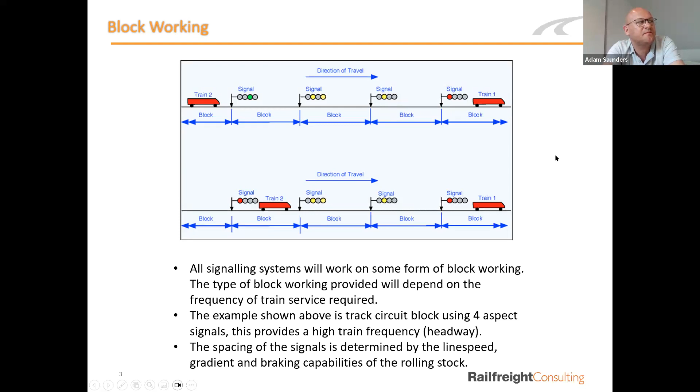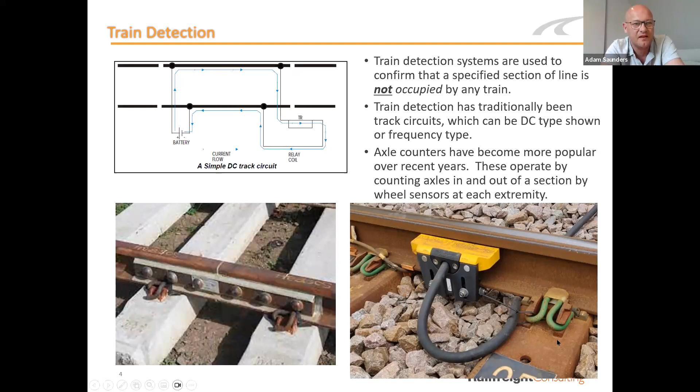And then just moving on to signal boxes. So obviously we've talked about the signals in the first slide. We've talked about train detection. We haven't covered points, but points move trains from one line to another, and they have to be detected, etc. And all of that forms a signalling system. That signalling system has to be controlled from somewhere by somebody. And that is what we call a signal box, where a signaller is located.

So the area that a signal box could cover was limited by how strong the signaller is to pull a wire over a certain amount of metres to clear a signal or move points. So on a section of line, you would have a signal box like that basically at every junction or at every station to control level crossings, etc.

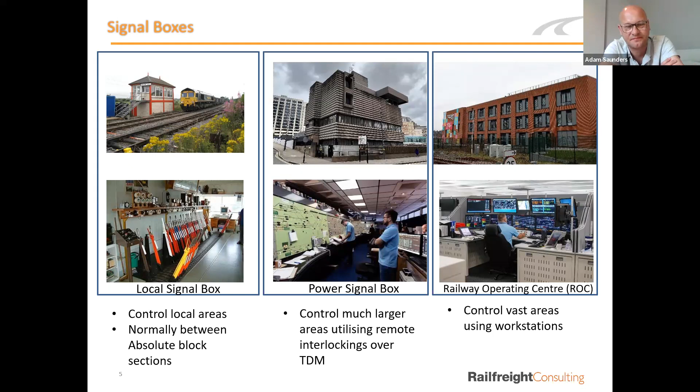Level 2, where you've got no line side signals, but they can be retained if need be. And the driver receives an in-cab indication of what the signal is. So it's still fixed block. So instead of having a physical signal at the side of the track, you have an indication to the driver in the cab. So obviously that's more cost effective because you've got less line side equipment.

And then level 3, which is the pinnacle of ETCS, where you have moving block. So where I talked before about fixed block, you can only let one train into a section at a time. That's quite restrictive to getting the maximum amount of train frequency on a line. So moving block is where the signalling system, with some clever technology, keeps the train behind a safe distance from the train in front. So a bit like adaptive cruise control that you have on cars these days on motorways, etc.

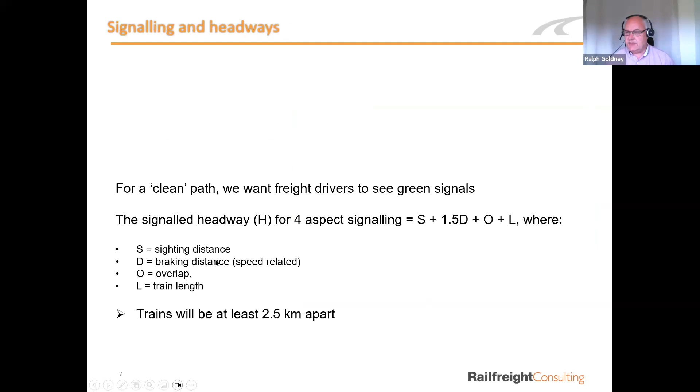Well, Adam's said a whole load of things which are probably more important than some of the people watching realise, because it leads us into a whole load of things about how you might plan trains. So let's take the top of this diagram again. We're coming from the left. As Adam mentioned, for human factors purposes, you want train drivers to see green lights.

And the other thing that's important to realise is that, unlike with trucks on a road, we always run the railway such that a train can stop before it gets to the position of the train in front. But that starts having some quite significant impacts on the capacity, and therefore how we put trains in the timetable. So typically in Britain, blocks are about half a mile long if we're old school, or about 800 metres if you're a bit more modern. And therefore you can see that if we require 2 blocks to brake a train, typically trains can brake in about a mile, something like that.

But then look at what we actually want to do, which is what's shown above. We want the train to approach a green signal, which effectively means there have to be 3 blocks between that and the train in front. So if you go and ask signal engineers, people like Adam, what the headway for signalling is, they'll quote that little formula there, and it's got 1.5 times the braking distance, because obviously 3/2 is 1.5.

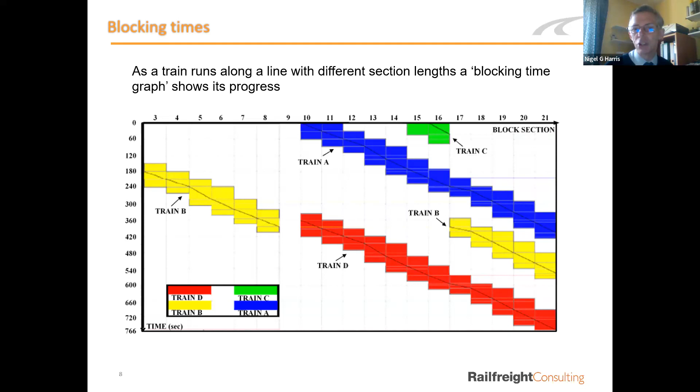So the trains themselves may be several miles apart, but we're just on the verge of one train impeding another. And that's really what we try and avoid doing. Thanks, Ralph. So that would be fine if you only had 2 trains.

We run about 24,000 trains a day in Britain, and there's, you know, Clapham Junction with trains all over the place. And this is where this all gets a bit tricky. So we're now going to look at how we're going to do that. Thank you.

So, focusing specifically on freight, we have a freight customer who has some requirement. I'd like to move this many hundreds or thousands of tons of stuff between here and there. And you'd typically go to a freight operating company, have a chat with them, discuss how that might be done. How often are we going to run these trains? How long are they? That kind of stuff.

And Network Rail has the ability to flex or just kind of bend, if you like, the train paths of other trains. Now, there might be various reasons you want to do that. It might be that if I want to run a train for Adam, I could then go to Ralph and say, sorry, Ralph, would you mind if we ran your train 1 minute earlier? Because then I could fit Adam's train in. That's what I describe really as the deliberate part of this.

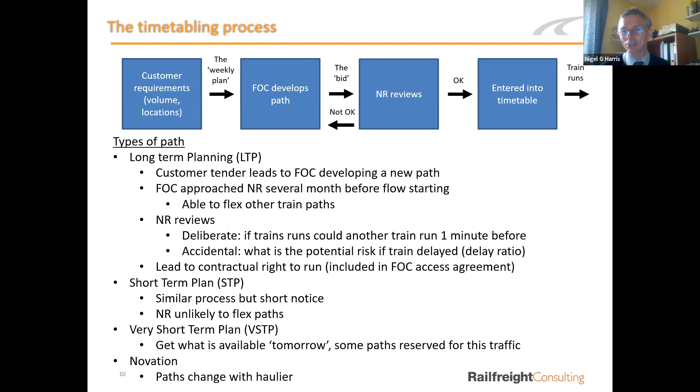Okay, thanks, Nigel.

Now, that's fine, but how do we actually get these train paths? Let's go back a stage. You can't write a train timetable without a whole lot of assumptions. You do need to know how long it takes to get from A to B, and you do need to make some assumptions about how long you want to spend in stations or terminals, and we'll look at each of those. So let's look at the times as you go along. Some of the systems you can see reported, and there's actually a very good unofficial one called Real-Time Trains, report things to the nearest 15 seconds.

What you can infer from what Adam said is that actually we know where trains are potentially to the nearest second, because when the first wheel goes into the next track section, we know where that's happened. But our systems are a bit old in terms of planning. Half minutes are very common. Other railways use tenths of minutes or whatever, but we're generally at 15 or 30 seconds here. Now, if you were a clever engineer, and I'm not, and you know how much a locomotive weighs and what kind of traction motor you've got in it, you could work out how it's going to accelerate and brake. But of course, this all varies by type of train.

And where this gets really messy is for each pair of adjacent places. So let's pick the East Coast Main Line, Peterborough and Grantham. We need one set of times if you actually stopped at Peterborough and are going to sail straight through Grantham, another set if you passed through Peterborough and then stopped at Grantham, another set if you've stopped at both, or yet another set if you've not stopped at either. You need a different time. Now, we'll try and keep this simple for now.

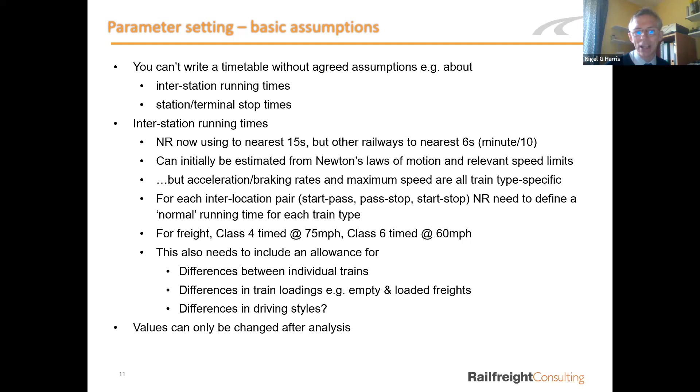And then I won't ask you personal questions about how you drive your car or how your mates drive, but we all know there's some boy racers out there. Now, it doesn't really apply so much to train drivers, but certainly some of them will accelerate and brake more hard than others. So we kind of land it with some allowances here, and we have to work out what numbers we want to put in.

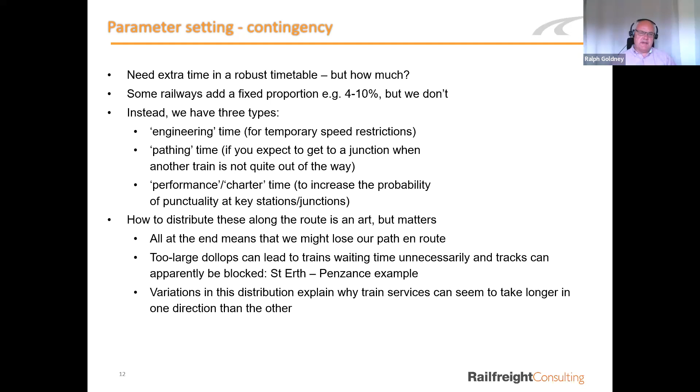Thanks, Ralph. Okay. I'm always amazed how my train's late at Milton Keynes but on time at Euston, and I think that's probably because there'll be a dollop somewhere.

Now, as well as what's physically possible, so Adam described how the signalling system works, and we can look at how a train brakes or not, there's what's sensible. If you go and stand in a field next to the main line, you see a train go by, red, yellow, 2 yellows, green, signals go by, we might be back to a green signal in 90 seconds. So you'll say to me, okay, that goes into an hour 40 times. We could run 40 trains an hour. Oh, yes, not really. Because as has already been hinted, there's all sorts of other things that reduce capacity. I mean, junctions, for example.

And we don't want those train drivers, if you think about the very first slide, to be going along and for the signal to be clearing from double yellow to green the second they see it. But there's other things that are just not sensible. And I'll give you an example here.

There used to be a junction in Buckinghamshire, in the middle of nowhere, where 2 single lines met. And we did some performance work for Chiltern Railway, and trains were getting late. And we discovered that's because a train was coming along a line and turning left, and another train was timed to go in the opposite direction 30 seconds later. You have to think carefully how this works.

You go along in a train, again, statement of the damn obvious, the back of the train comes after the front, so even if the front of the train was perfectly on time to the second, the back of the train could easily be 10 seconds later. And then Adam would probably like 5 seconds for his points and signals to change.

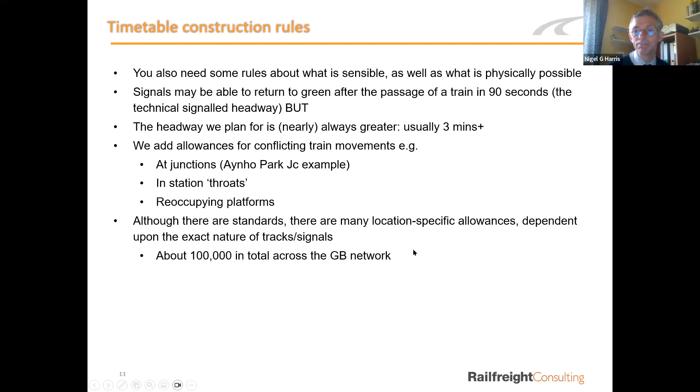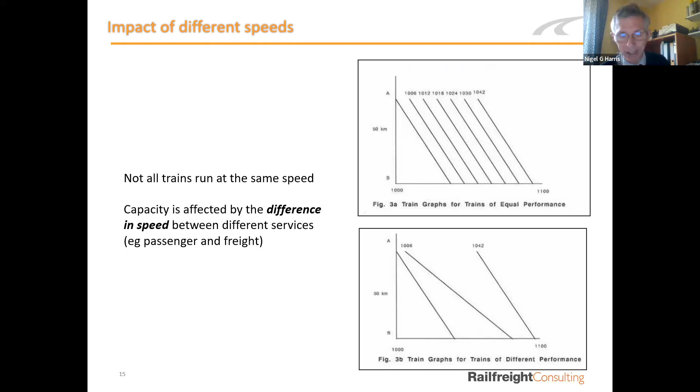So here's another hour, where unfortunately we've got a couple of quite fast passenger trains shown with a steep line on our train graph, and this freight train. And suddenly you can see that instead of, I think we had 6 in the top picture, we've only got 3 trains in here. So what's shown in italics there, an important point for freight operators, is that the difference in speed between different trains has a direct impact upon capacity. And that's a very important deduction, which is complete pain, quite frankly, but it's a very important answer.

So what we'll do is very quickly share with you a couple of examples. Now, this one's a bit ancient, because when I find a good example, I like to run with it. Between 1994 and 2007, if any of you used Eurostar, when it was opened, it went out of Waterloo.

And if we look at a bit of the track network in South London, we've got the line from Victoria to Bromley. It's got lots of tracks from Victoria to Brixton and 4 after Shortlands, and a 2-track section between Brixton and Shortlands, and a loop via Catford. And at Kent House, we've got an opportunity for trains to overtake each other.

Now, we had a big freight problem. As you know, we don't make anything in Britain anymore. We all buy it from China. And of course, we've got people like Maersk who turn up with their enormous ships, and we need to start to take stuff away. So they'd previously been delivering shiploads of stuff to Tilbury, and they were looking at accessing Thamesport instead.

So they approached Freightliner. They're a freight operator, others are available: can you help us with our train? And of course, if you turn up with a ship with 10,000 containers and we get maybe 40 of them on a train, it's an awful lot of trains. And they deduced they'd have to run one train every hour, more or less continuously, excluding the peaks. So a train graph was knocked up.

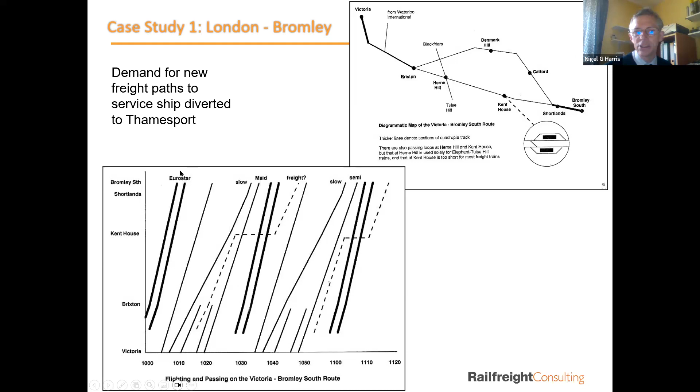Now you'll notice I've shown the Eurostars there as thick black lines. There's two reasons for that. A, they were important, and B, do remember Eurostar trains were very long. So we've shown them on there.

Now what this diagram also shows is something called flighting, F-L-I-G-H-T-I-N-G, where if we can run trains of similar characteristics quite close together, put bluntly, we can fit more of them in the timetable. And the only person who's unhappy is the electrical engineer who has to provide a whole load of power all at once, but that's their problem. From a timetabling perspective, it's really efficient. A couple of Eurostars, then a reasonably fast train, then a slower one, and you can fit more of them in.

Okay. And the Eurostars, by the way, can be arranged in pairs because, for example, we can run one to Paris and one to Brussels. So passengers don't so much need them evenly spaced. But we knew we were going to have a problem with these freight trains. And it was obvious we were going to have to be overtaken. So we got that loop at Kent House. And what you see on a train graph, if the line is horizontal, a train is stationary.

So thank you. So people knocked up very quickly, it takes about 10 minutes to do that. We could sit there and you'll see in every hour, they sort of identified two different train paths. And Network Rail have a group of managers called the Sale of Access Rights panel, SoAR panel, who sit down once a month and go through things, and they were presented with these alternatives.

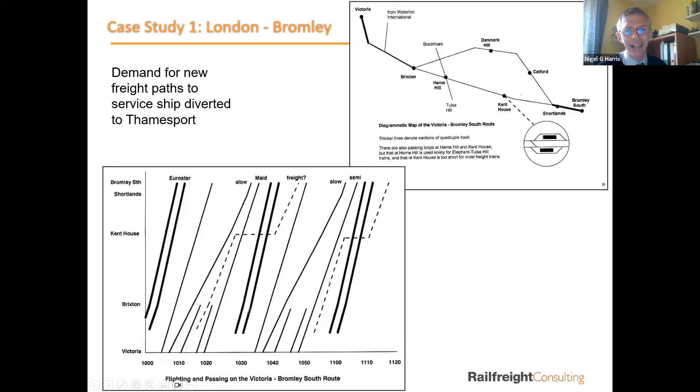Let me crack on, Marge, if that's all right.

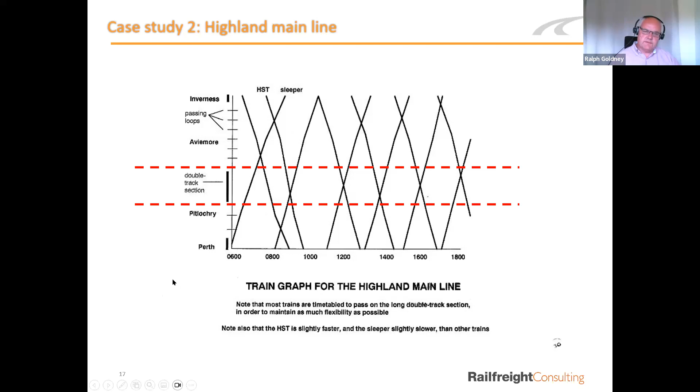That's really great, Nigel. Thank you very much for that. I just want to make one observation here, going back to this graph. This is one of the main reasons why it's very expensive to make new freight connections, because if we need to put a new connection in here, let's say, then we need to put a new signal in here, and it all daisy chains back, up and down the line. And this is one of the reasons that it's very expensive to make new freight connections.

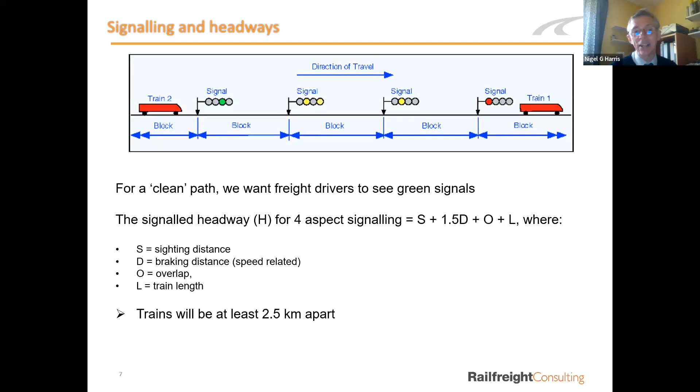Is that right, Nigel? Absolutely, and that's the physical bit. You may also end up screwing up the timetable for all the rest of the day as well, if trains are booked to be going along like that. So, in summary, we'd like it to be easy, but because we've got a series of safety related signal equipment that Adam described and a formal planning process, planning a railway is not that straightforward.

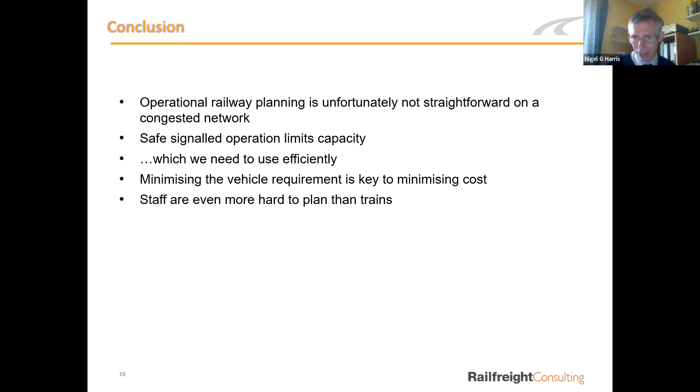It's not like a truck where you can just set off, and if you screw up other people, it's tough. We don't allow that on the railway. So there's the safety bit and the efficiency bit. And then we want to make sure that we use our trains efficiently because they're expensive pieces of kit. And then we've got some drivers to think about as well. That's why some of us are going a bit grayer than others.

Thank you very much, Nigel. That's really great. That was really interesting, and we're very close to time here. Yeah, thanks. Sorry, there was a data connection issue at this end. I trust when digital signaling's rolled out, it works a bit better than domestic Wi-Fi.